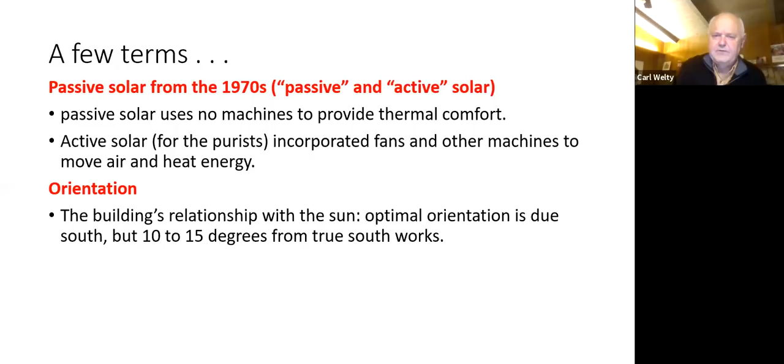Orientation. Orientation is the building's relationship with the sun. The optimal orientation is due south, but 10 to 15 degrees from true south also works.

Thermal mass is the material, usually a concrete slab, that absorbs and stores heat energy. A building is heated when heat energy accumulated during the day radiates into the building space during the night. And a building is cooled when the heat energy accumulated during the day is absorbed in thermal mass, and later transferred into the cool night air.

I'll talk about this more later, but the cooling aspect is why we think it's not just about solar orientation, but the advantages of cooling with natural systems. And I think that's going to be more critical as we move into a warmer climate.

A couple of big ideas that I want to put out there for conversation: think of the building shell as an energy system, not just an envelope or a box that we put equipment on top of or inside of. This is, I think, a real critical shift that I find really interesting.

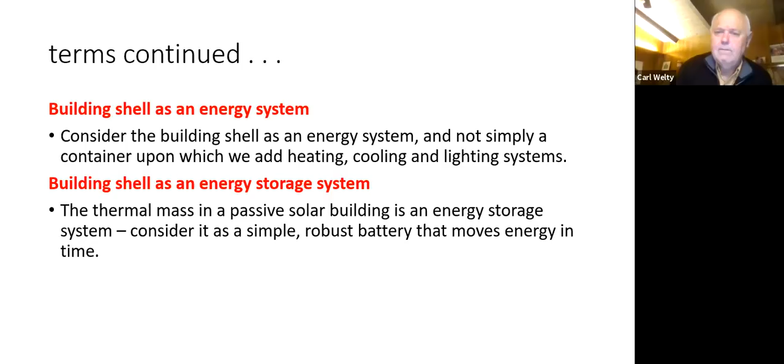And then also the building shell as an energy storage system, like the building shell as a battery. More on that later. So advantages: cost-effective. Passive solar buildings are typically 50% or more efficient than normal buildings, with little or no increase in construction cost. Passive design strategies reduce cost of energy and maintenance over the life of the building.

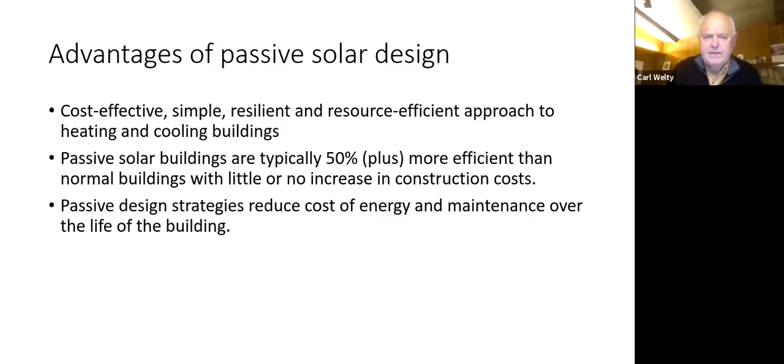This is really critical. Passive solar buildings continue to provide thermal comfort even when the energy is interrupted. With power shortages and power shutoffs for fire safety, this will become more important in our near future and our present.

We can build energy efficient buildings without the need of rare earth metals. And to me, this is an important part of the art. Passive solar buildings connect us to nature and increase our awareness of nature.

Consistently perform better. Typical green buildings are 35% better than normal buildings, whereas passive solar buildings are typically 50% better than normal, and many are 70 and 80% better than normal buildings. So a well-designed passive solar building is really 2 or 3 times better than typical LEED buildings.

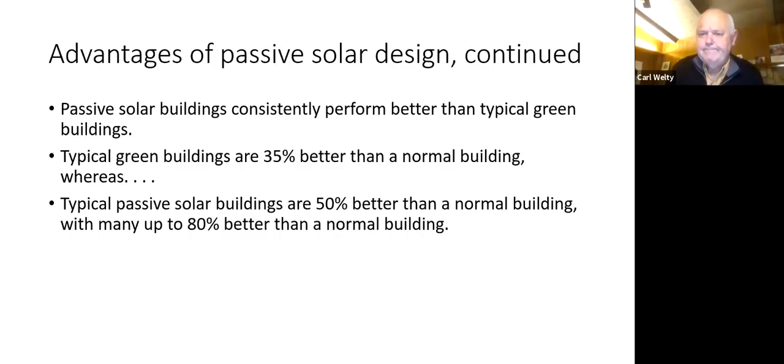Some questions that people ask: what about existing buildings? There's lots that can be done. What if the site does not have proper orientation? I'm going to show you 2 projects that show what you can do with a little bit of creativity when the site is not ideal.

And passive solar buildings look like they were designed in the 1970s. I don't think that's true, but even if it was, climate change requires us to think about something other than fashion.

Questions I like to ask: why are we satisfied with 35% better solutions when solutions from the 1970s are two and three times more efficient without increasing construction costs? Why do we put so much confidence in machines and high technology when there are really beautiful examples in ancient history, in the 70s?

And why do we ignore the beauty and simplicity of nature and the benefits of working in partnership with nature? Principles of passive solar. I apologize, I'm going to probably race through a lot of things so we can get to questions, but I'm willing to share this so people can spend more time in the privacy of their own homes. How it works.

If only there was some kind of infinite power source that was free to use all day, every day. That's the obvious point.

Passive solar works from really simple facts of nature. The sun is lower in the winter and higher in the summer. Nighttime temperature in California is cooler, 25 to 30 degrees cooler than the daytime. And there's always a reliable prevailing breeze for natural ventilation and summer cooling. It's really very simple, and if one pauses and thinks about it as part of nature, these simple things can be leveraged into making very efficient buildings.

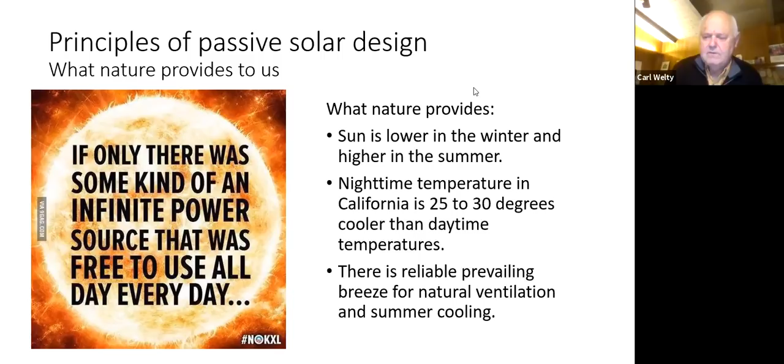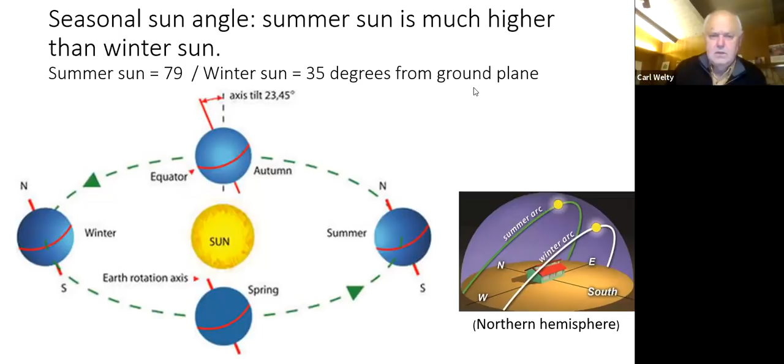I think we probably all understand this a bit, but the reason why the sun is lower in the winter is because of the tilt of the earth.

Starting off, the first rule is orienting buildings with the long direction east-west. This is a plan for a visitor and cultural center for a project that we've been working on.

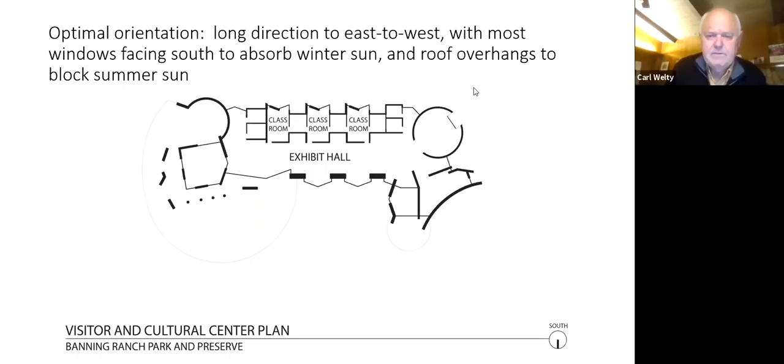And beyond the building, we can think about using landscape to shade buildings or manage the microclimate outside of a building.

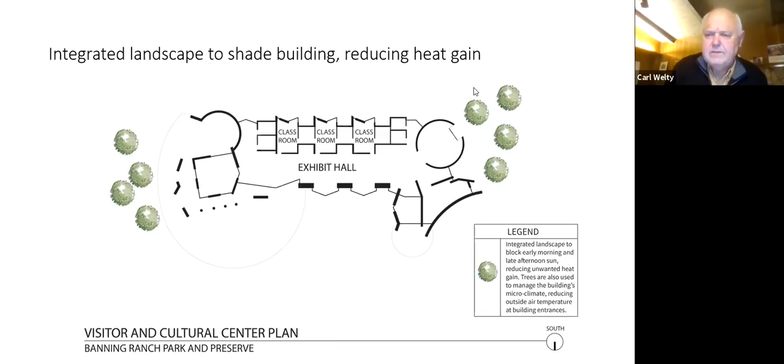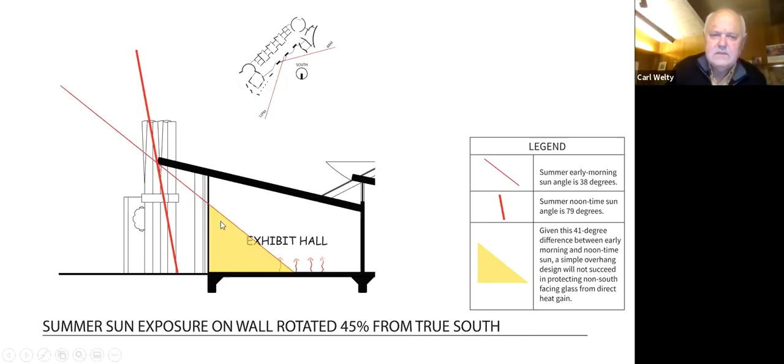So the same building, if it was oriented 45 degrees to the east, the early morning sun would come into the building at 8 o'clock, and because that sun angle is so low, there would be a lot more direct solar gain, heat gain, than for a building oriented to true south.

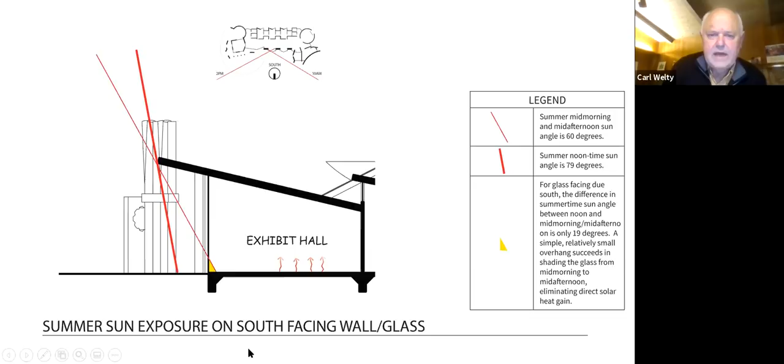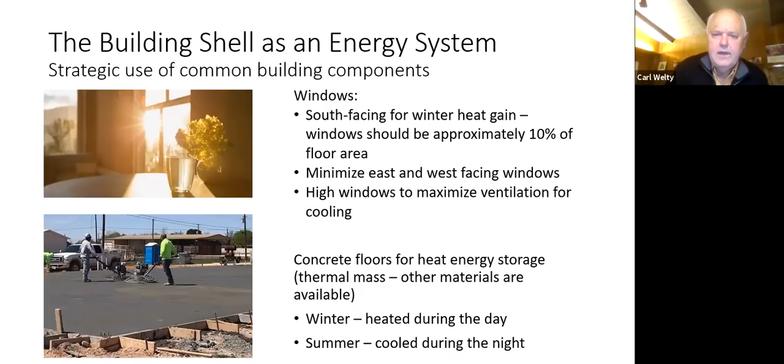So the building shell is an energy system. The idea is we start with the stuff that's already in the building: windows, concrete slabs, roof overhangs, walls and roofs, and just think of those not just as the thing that makes the shell or the design, but think of them in an integrated way to make a building more energy efficient.

And you're going to pay for those anyway. So the idea is you use those in the right way to leverage the most energy efficient design using these materials that are often not considered as part of an energy system.

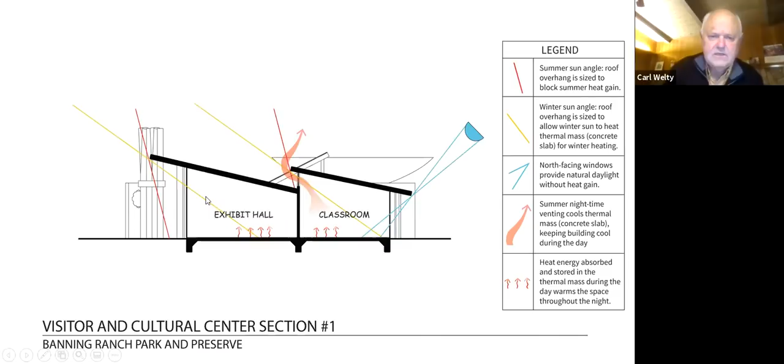In the building - and I'll show this in more detail - the building is designed so there's a few places where there's an eyebrow or clerestory facing north to bring natural light into the exhibit hall. This combination of south-facing glass and north-facing glass means the exhibit hall would require very little artificial lighting.

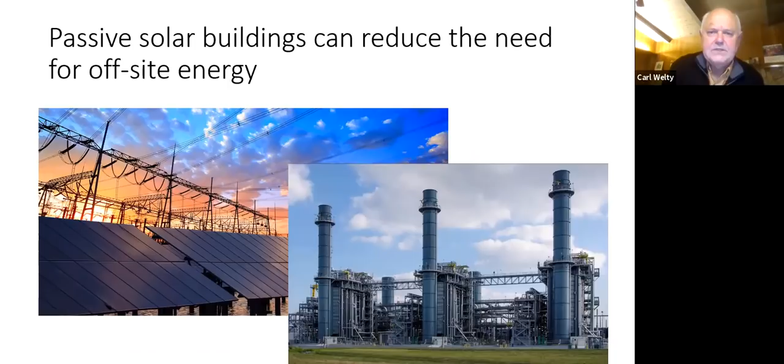Passive solar buildings can reduce the need for off-site energy.

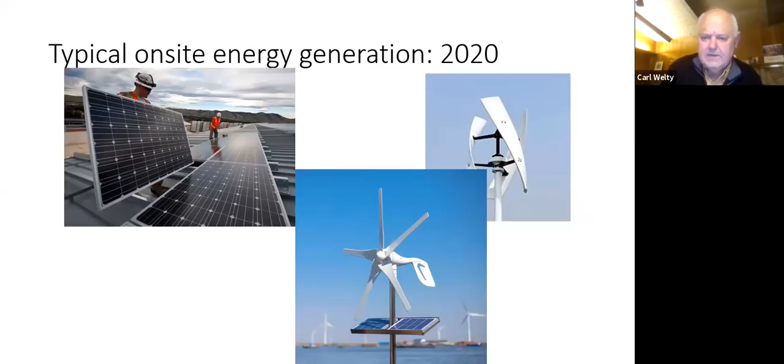Now I'm going to start talking about today versus the 70s. Today, typical on-site energy generation, 2020: solar panels, windmills, even kind of silly machines that try to combine windmills and solar panels. On-site energy generation, 1973.

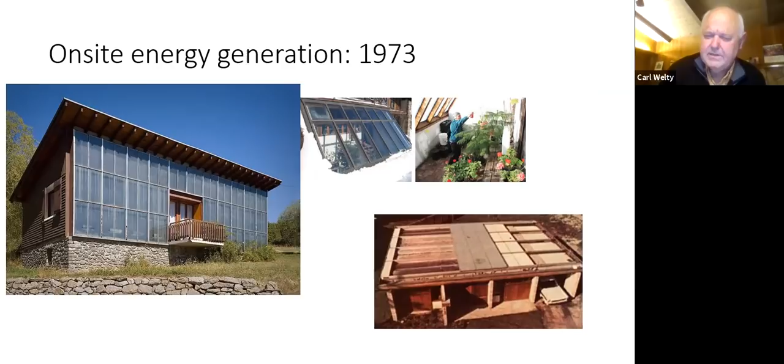In the 70s, because we didn't have such high technology, we designed buildings using water and glass and other materials to make the building efficient. So I think of that building as an energy system. Typical heating and cooling machines and equipment.

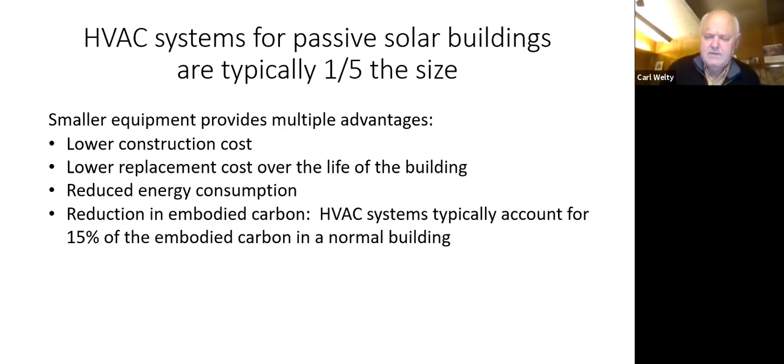HVAC systems for passive solar buildings are typically 1/5 the size. The smaller equipment has multiple advantages: lower costs, lower replacement cost over the life of the building, reduced energy consumption. HVAC systems typically account for 15% of the embodied carbon in a normal building. So if the mechanical system is smaller, or even not required, you not only save the carbon and cost of that system, but you save that 4 or 5 times over the life of a building.

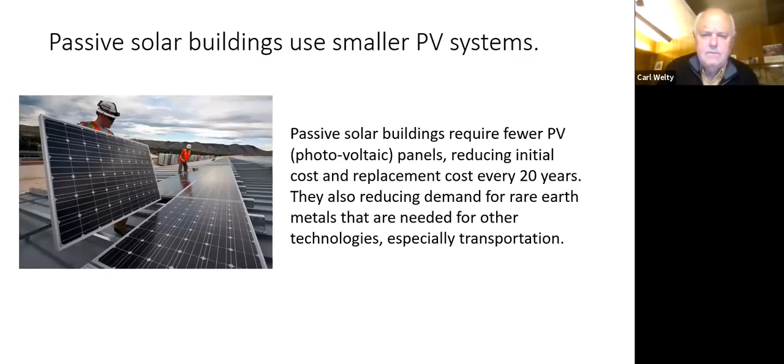Passive solar buildings require less photovoltaic panels. Fewer solar panels, less high technology, will allow us to reduce our need for rare metals and other toxic issues with batteries.

Solar-oriented and climate-appropriate design in ancient history. Ancient history is filled with lessons about how to build great cities without our modern energy grid.

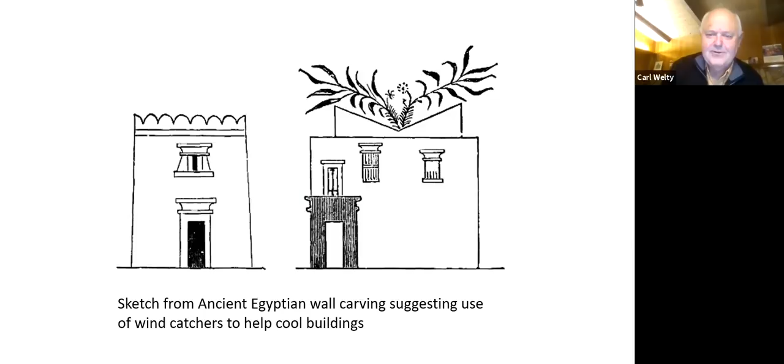Wind catchers are wind cooling devices. There's some evidence that these might have been used in ancient Egypt 3,000 or 4,000 years ago. This is just a drawing from an Egyptian wall carving.

Always nice to quote Socrates, or maybe even learn that Socrates was maybe an early passive solar architect. Socrates thought that houses with proper solar orientation and porticos made a better house. The plan on the left is the city of Priene, now in modern Turkey. It was the first Greek city built on a grid, and as you can see, the grid was oriented south.

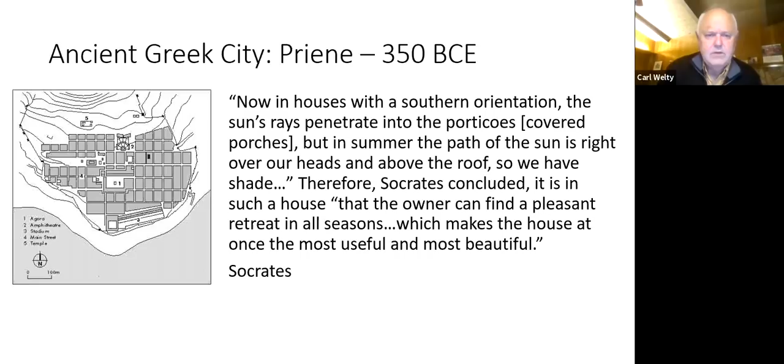Now I'm going to race through this. Courtyard housing is really common throughout the Mediterranean, and I think it's an important lesson for California because we have a very similar climate.

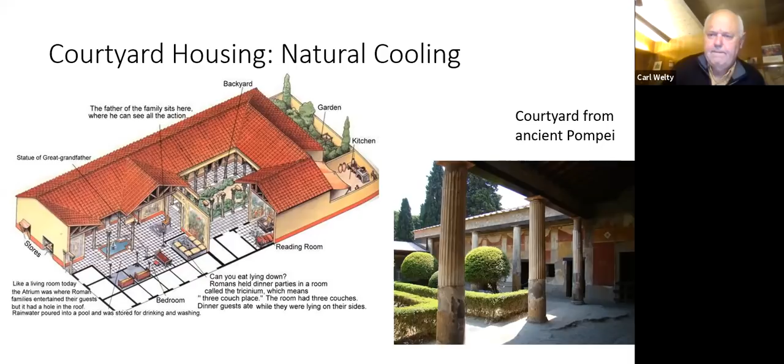The courtyard from Pompeii, Egypt, Spain - these are all more beautiful than that. Africa, India. The point is that there's plenty of evidence that these things work, and they worked when civilizations and cultures didn't have our modern energy grid. I think that's an important clue for us as we enter an uncertain future, when energy needs to be preserved and may not be so reliable.

Other examples: the Native American cliff dwellings. They use the cliffs, the face of the cliff above, for shading.

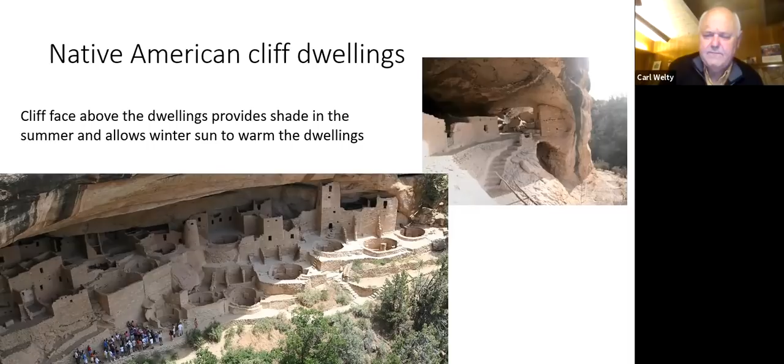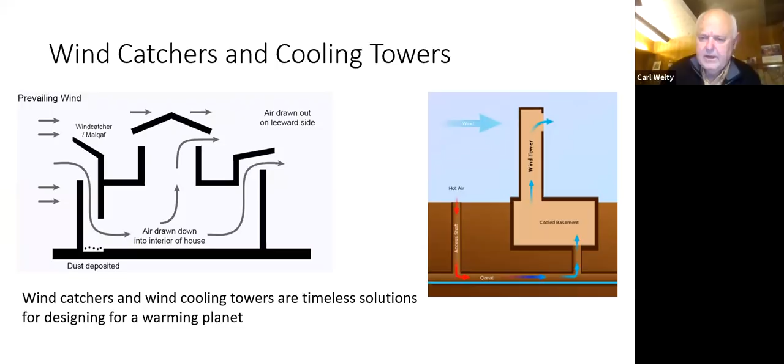Persian wind cooling towers, until my research for this document, were my favorite. Now I have a new favorite, but these Persian wind cooling towers sort of speak for themselves. They're extraordinarily beautiful, and the function is very clear. The way they work, they capture wind from the prevailing wind direction and channel it through the building. Oftentimes the air is routed through an underground tunnel and brought into the building.

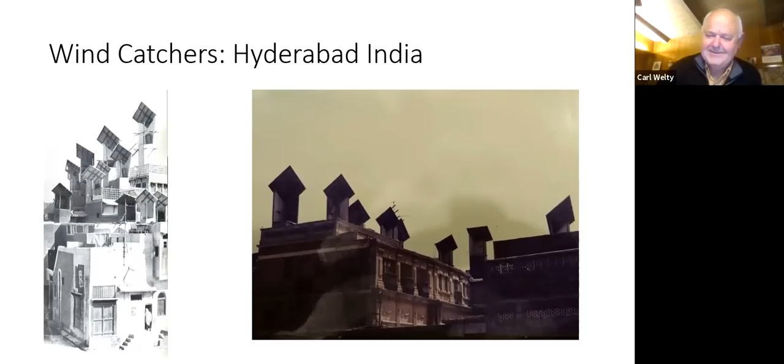My new favorite. Architects sometimes talk about solar orientation, and the buildings look like they're from the 70s - but there's something modern about it. I'm really excited about these things because they're just really, really cool, and there's such potential for great modern design creatively applied. Just great pictures of these cities that were covered with these wind catchers. I want to learn more about them, because it could be capturing the wind, but it also might be working as a wind foil that helps draw the air out. But I think these are capturing wind.

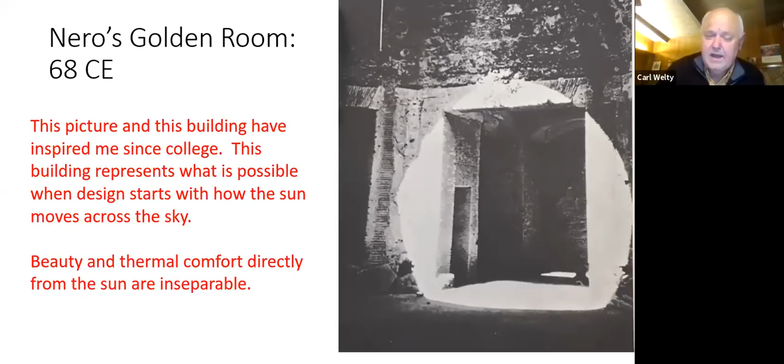One has to admit that that's a compelling picture. It's really beautifully simple - it's an octagon. There are 4 rooms, and each time of day that light effect would occur at different points - for example...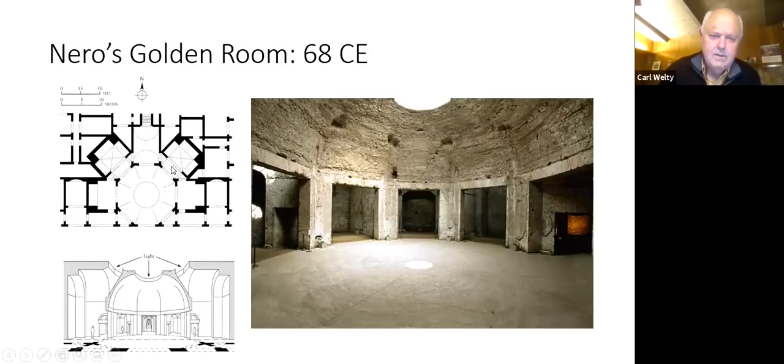When I saw that picture, I had already had my passive solar class, and I immediately went to the plan to see that it was designed correctly. So in the morning, light would come here; mid-morning, mid-afternoon, late afternoon.

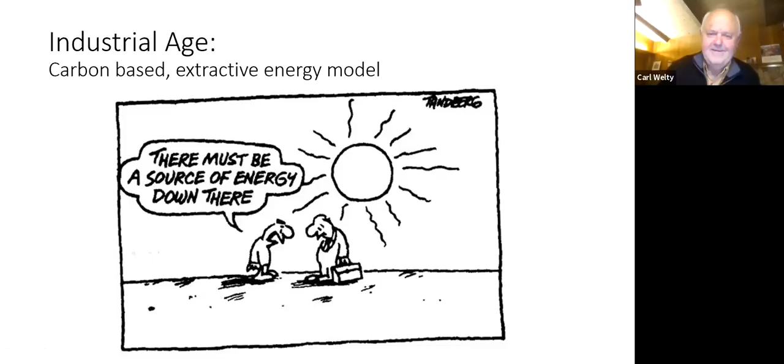So it's the industrial age, or maybe the 1990s also - we sometimes miss the forest.

Recent history of passive solar: a professor I had in college, who I'm now starting to work with, Ken Haggard, received money from the state and federal government for research on how to build energy efficient buildings, he and others. There was great work - great solutions discovered and demonstrated.

But in the 90s, we lost that. So I'm a real advocate for trying to recapture that knowledge, because we can provide more efficient buildings, more cost-effective, and more resilient buildings.

The context: passive solar research was motivated by the oil embargoes and the oil crisis. But some smart architects were even thinking about solar orientation before the 70s.

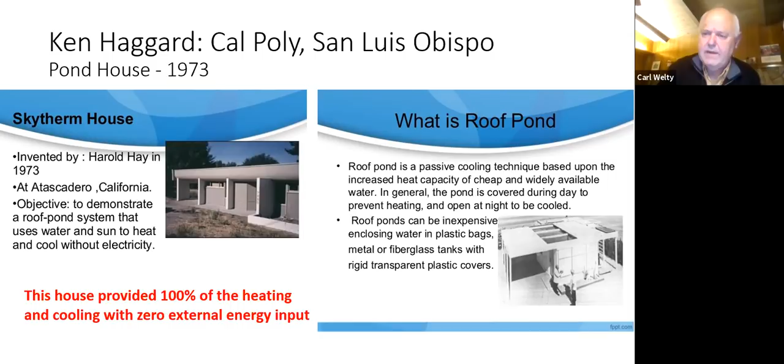This is a roof pond house designed by Ken Haggard in 1973. This house provided all the thermal comfort, all the heating and cooling, without any energy input from the grid. It's completely possible. Ken Haggard continues to do extraordinary buildings, which we'll talk more about.

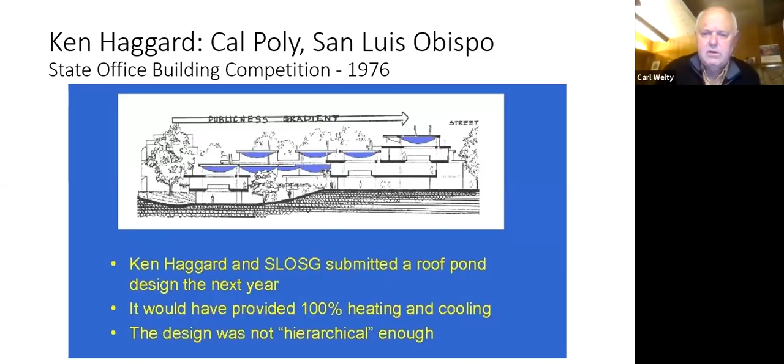This is a design he created for a state office building that would have provided 100% of the heating and cooling in 1976, but the state thought it wasn't noble or hierarchical enough, so it wasn't built.

Another important person who did work in the 70s and 80s was Ralph Knowles from USC. There's a great body of knowledge and research, but he really looked at urban forms and building cities in a way that provided direct sunlight.

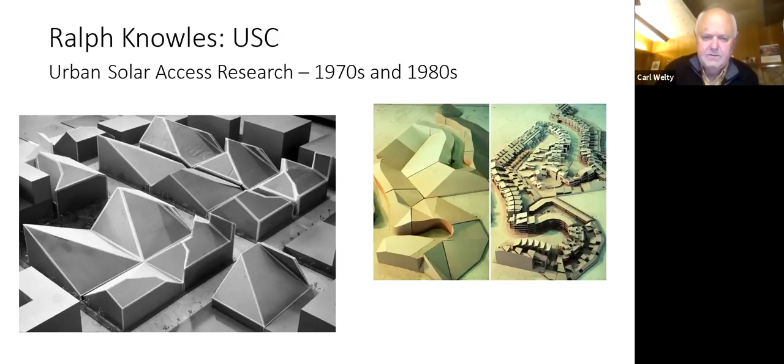In the 70s, two home developments in California incorporated these ideas, the Village Homes in Davis and Meadowood in Claremont. I just think of all the millions of homes that have been built that turned their back on these ideas.

So what happened to the research from the 70s and 80s? Political stability in the Middle East created cheap oil, increasing interest in PV energy systems and other complex technologies. The simplicity of passive solar design creates fewer marketable products and specialized services.

I love this cartoon with a solar powered tanning salon. I think it represents our interest in high technology.

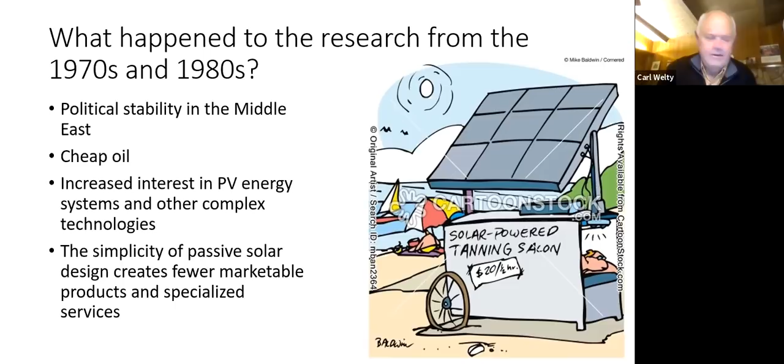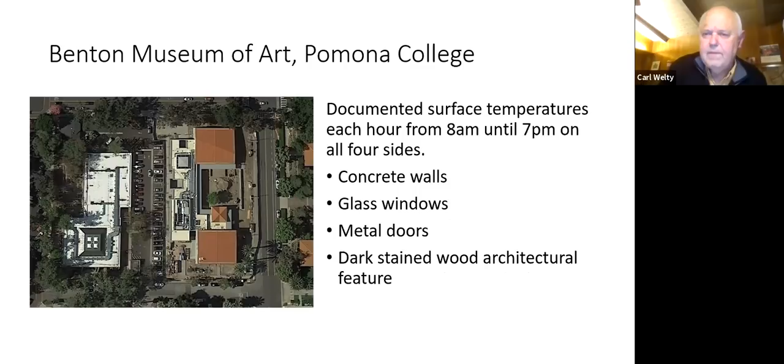I'm going to start racing through this. We did some research measuring the temperature of the Benton Museum. We measured the surface temperature on concrete walls, glass, metal doors, and wood every hour from 8 a.m. to 7 p.m.

The hourly average temperature on the south side is typically 10 degrees less on each material than on the east and west sides. This is because during noontime and afternoon, the sun angle is so high that a lot of heat energy is reflected off the surfaces, whereas in late afternoon and early morning, the sun is lower and more energy is absorbed into the walls. The daily high surfaces are quite extraordinary.

The east elevation glass reached 145 degrees. The south elevation glass never went above 110 degrees. This is a surprise, and I'll talk more about it: the dark wood stain on the east side reached 155 degrees.

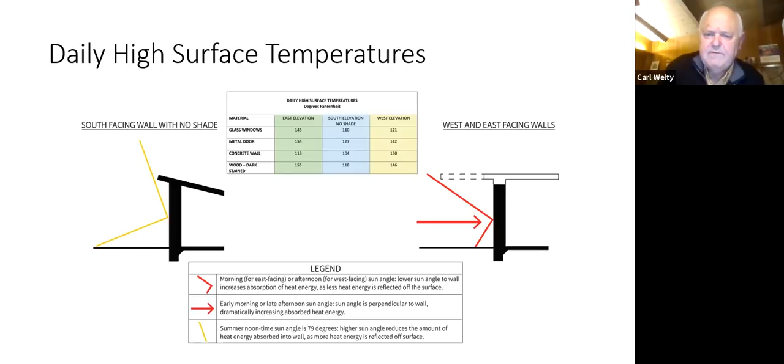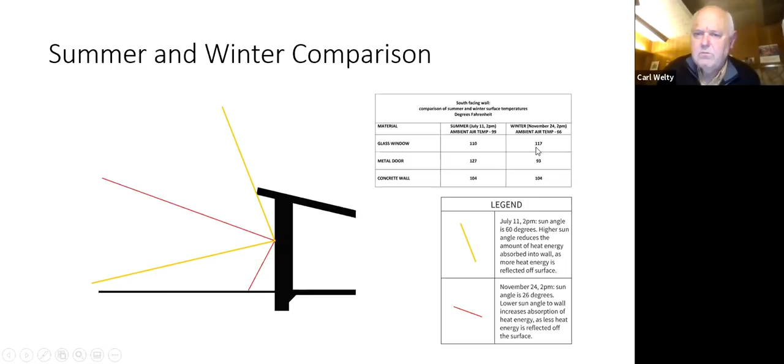Comparing summer and winter at 2 o'clock, even though it's 30 degrees cooler in the winter, the building temperature still warms up. This is because in winter the sun is so much lower that more energy is absorbed into the wall, which explains why temperatures are greater or higher even though it's 30 degrees cooler outside.

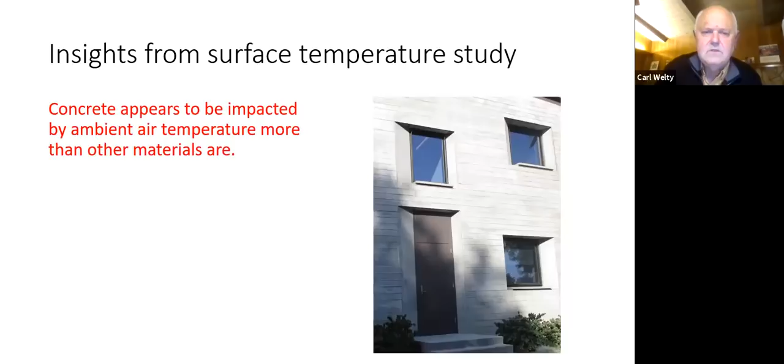A couple of surprising observations: even the light shade from a small tree cooled the temperature on the concrete. The temperature there might be 6 degrees cooler than elsewhere—it was really quite a dramatic difference. The possible lesson is how effective shading from trees could be on buildings.

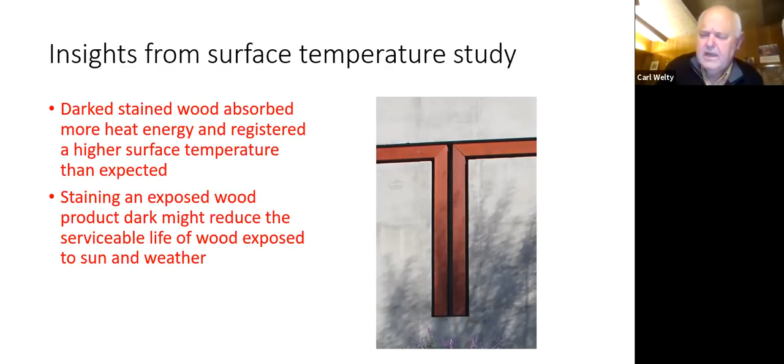Some other really interesting research from Ralph Knowles found that the thickness of some adobes was adjusted depending on which direction the walls were facing, which partly inspired why I did this research—why it's important for us to understand how materials are affected by which direction they're facing.

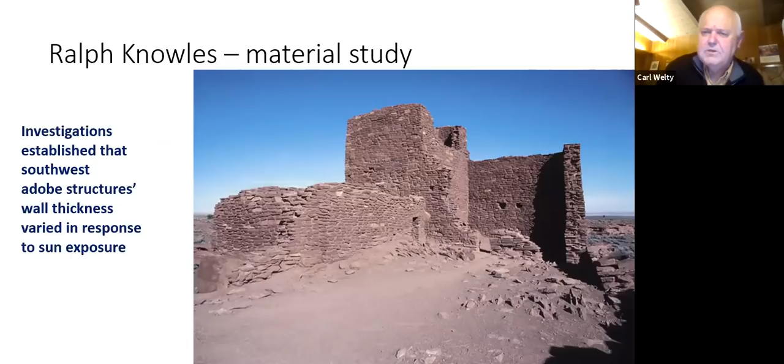So I'm just going to talk about what I've learned: the same decisions you make to make a building more energy efficient also make the building connect to nature. A simple passive solar house in Santa Monica—the street is at 45 degrees, so we had to do this odd design, but it necessarily gave us a garden outside the space.

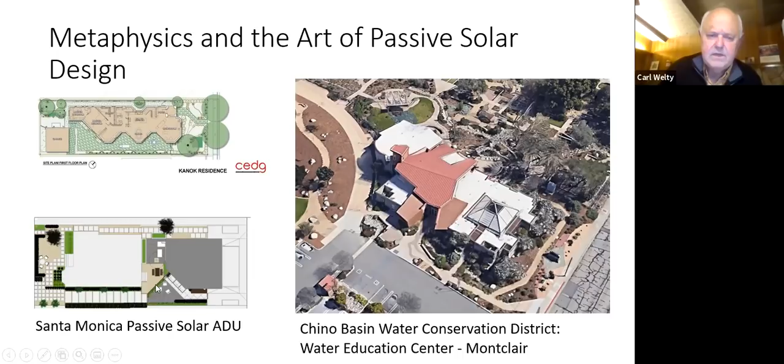This is a small project, an ADU I designed a couple of years ago. Again, creating a primary wall facing south, which is not parallel to the property line, created an opportunity for sun to come in and necessarily an outdoor garden space.

So you see the little three-dimensional drawing and the building built. That wall of glass enables light to come in. Because of the high glass, there's a double height space inside. The sun enters far into the north of the building in the winter, but can be shaded in the summer.

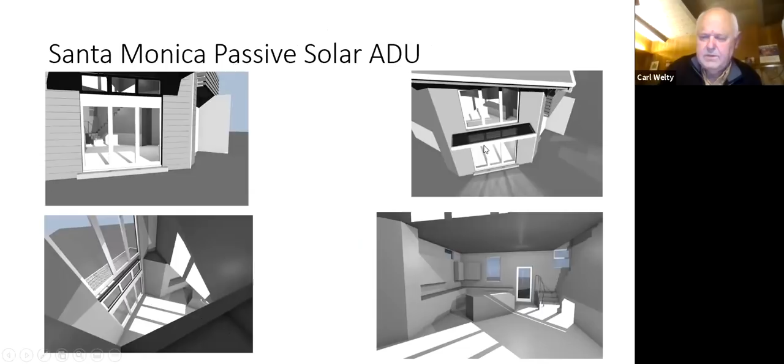The Chino Basin Water Conservation District—many lessons here. As we thought about how the sun moves, the wind cooling tower, with some windows on top and other windows, captures the last light of the day, really marking the change of time.

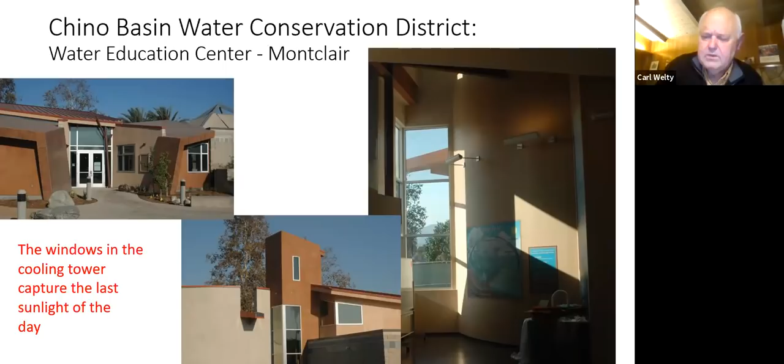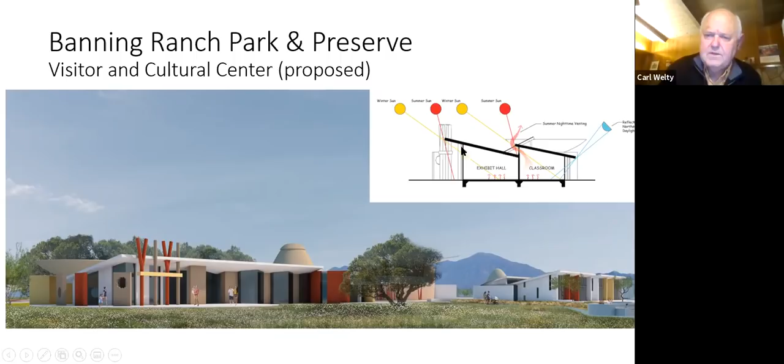The visitor center for Banning Ranch. This is the building, the visitor center facing south. So the design brings sunlight into the windows, and it also opens out to nature.

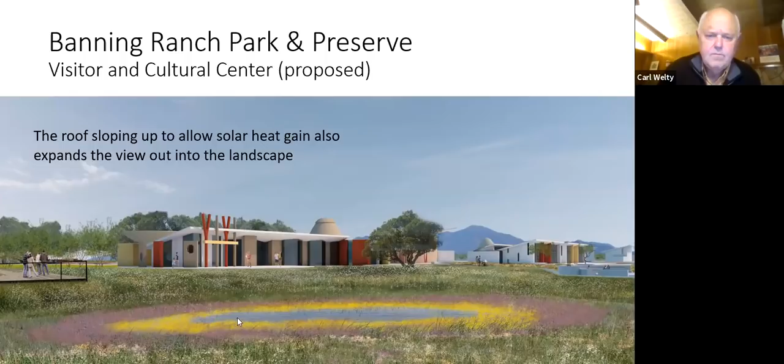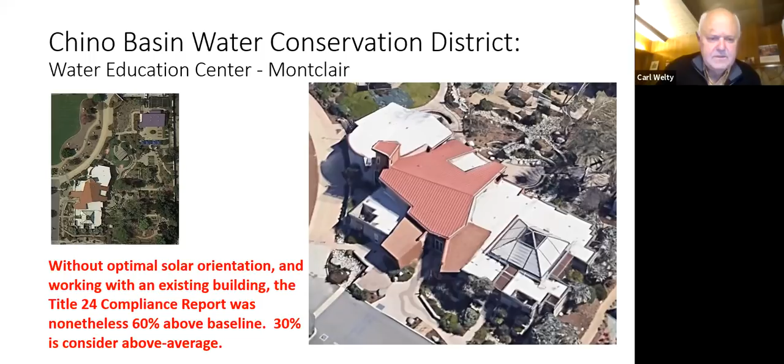I'm just going to race through some projects. This is the Chino Basin project, in Montclair—a really interesting project that, once COVID is over, will be open to the public. Without much effort, just thinking about the building envelope and natural light, we achieved our Title 24 compliance report at 60% over baseline. 30% and above is considered above average.

The passive solar home built in Santa Monica, as I explained earlier—it's a little different, but this building achieved LEED Platinum and was 75% over baseline for the Title 24 compliance report, 25 points higher than what our LEED rater had ever seen before.

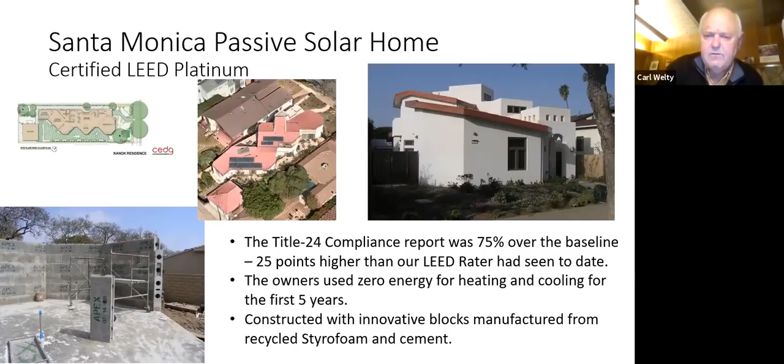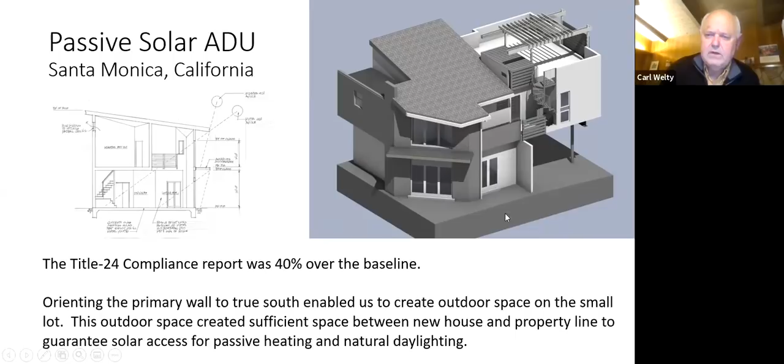Some images and drawings of the ADU I designed—you can see with the double height space, the light comes in. This project was 40% over baseline. So the lesson here is: building that wall oriented to the south created a space outside, and regardless of what is built on the next property, the light will always be available.

This is the Congregation Beth David in San Luis Obispo, designed by Ken Haggard, who has built 200 to 300 buildings. He really has much to teach us. This building is 80% more efficient than a normal building.

Actually, maybe I misspoke—its carbon footprint of greenhouse gas emissions is 30% lower than a normal building, and it actually costs less than a normal building. This is really extraordinary.

I want to say this very slowly: he's so knowledgeable that he was able to build this without an air conditioning system. There's no mechanical cooling system, which many people assume means if you don't have air conditioning, you're going to suffer and it'll be a little warmer than normal. But he's documented that it actually stays cooler than a normal building with a conventional mechanical system. This is really, really extraordinary.

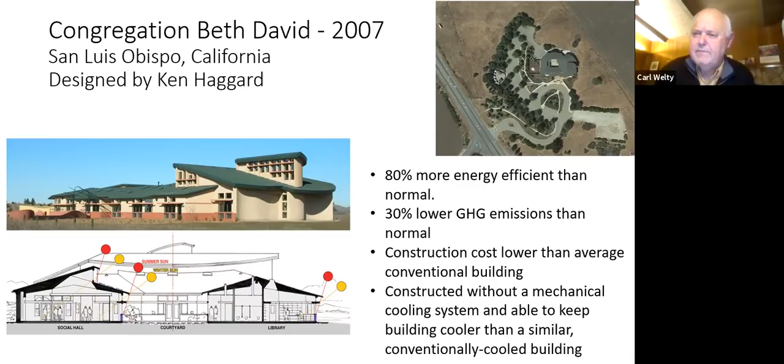And this building—San Luis Obispo has a similar climate to, say, downtown Los Angeles. Not as hot as San Bernardino, but it's not on the beach either. This is truly, truly amazing.

Before COVID, we started a conversation with some people at TBI about remodeling the building, and we all agreed it would be great to bring natural light in. Thinking about wind catchers and Ken Haggard's work with his synagogue, I thought we could design light scoops to bring in natural light, but also do double duty helping bring in cool air at night to help cool the building.

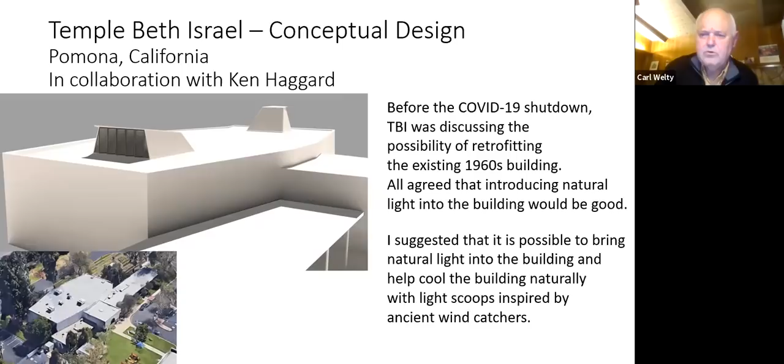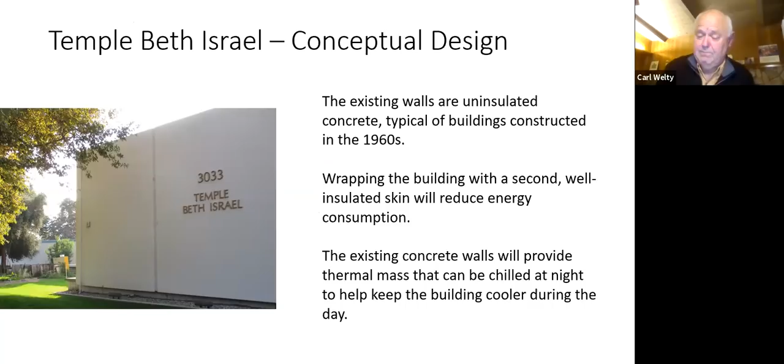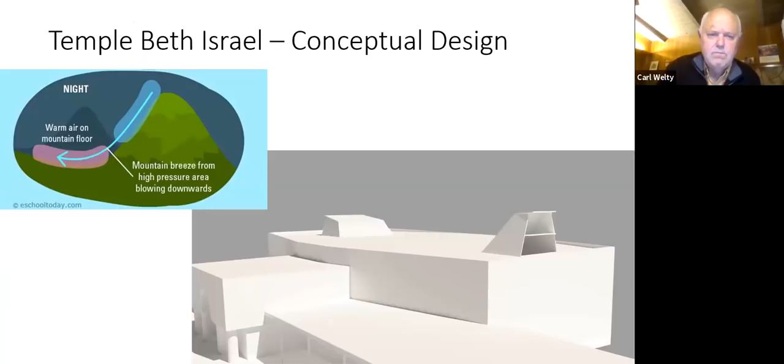The existing buildings have walls of uninsulated concrete, but by wrapping the building with a second insulated skin, that would make a lot of sense for energy efficiency. If we do that, the concrete wall becomes an extraordinarily sufficient thermal mass for cooling. We can also rely on prevailing wind, cooler night temperatures, and a naturally occurring mountain breeze that comes down from the mountains.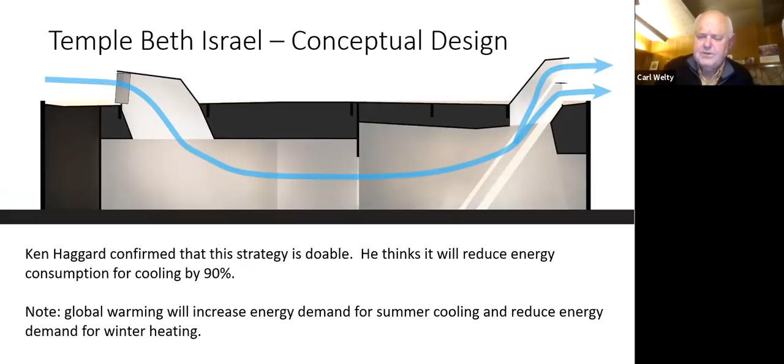Also, with global warming, our need for energy for summer cooling is much more critical than winter heating. Quick examples: I think atriums and courtyards have a lot of potential for being part of a new building's heating and cooling strategy.

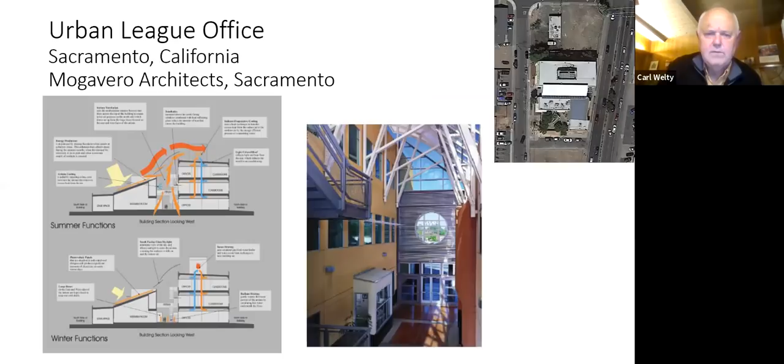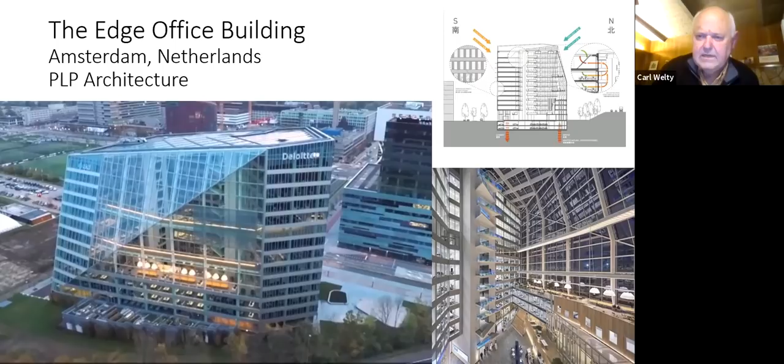This is described as the smartest office building in the world, in Amsterdam. Same principles: there's a large atrium, a beautiful space, oriented north, and the skin is designed to reflect heat and vent the building.

Quickly running through our Banning Ranch project: it's 380 acres of native habitat to be restored with a 10-acre park, including research and education facilities consisting of 4 buildings. Most of the buildings face south and open up to the landscape.

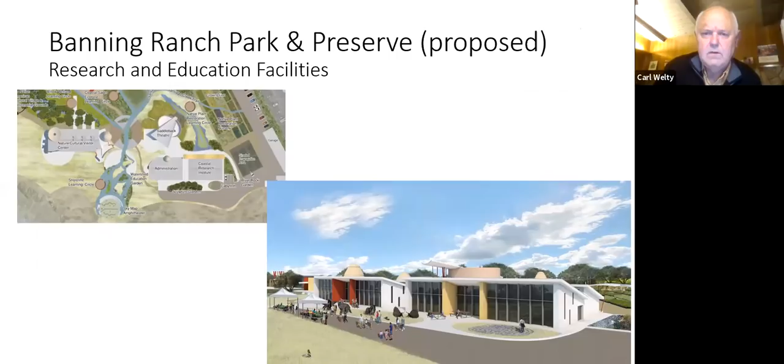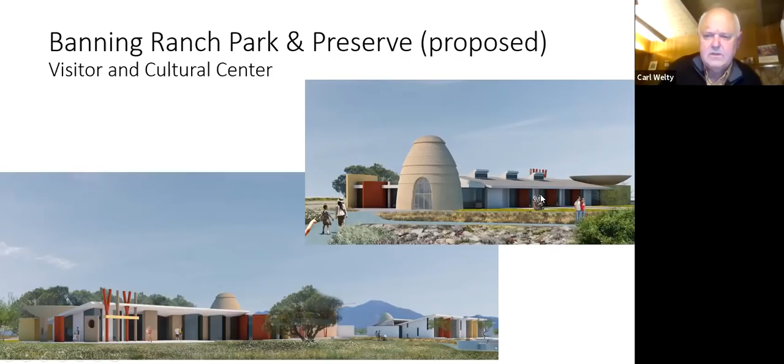Revisiting this building: the south facing side and the north facing side. So this is the example - the south facing glass is here, but the roof is designed so the winter sun comes into the rooms on the north side. On the north side we have 3 small eyebrows that bring northern light into the main space.

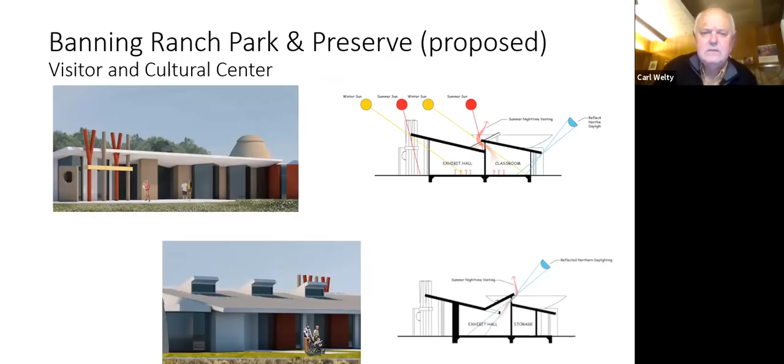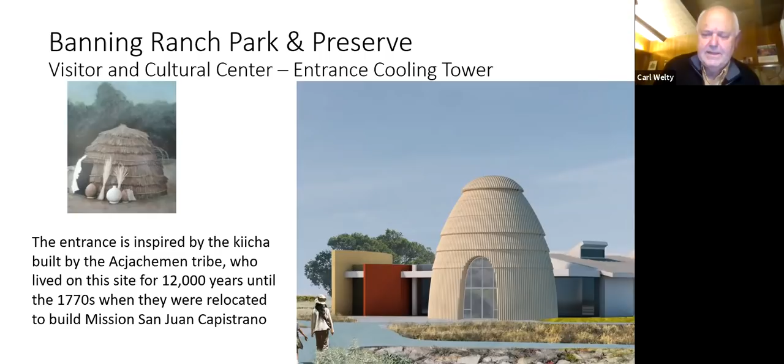The entrance tower is inspired by the kiicha built by the Native Americans who lived on the site for 12,000 years - that's a whole other story about environmental justice we'd love to discuss another time. It's reformed into a modern building entrance and wind cooling tower.

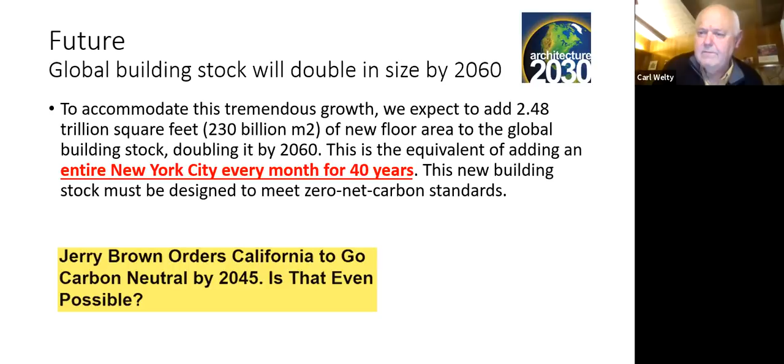So, how am I doing on time? The need for building better - to the question of what about new buildings, well, we need a lot of new buildings. We're projected to need a new New York City every month for the next 40 years. So there's plenty of opportunity to build new buildings that are more energy efficient with reduced carbon.

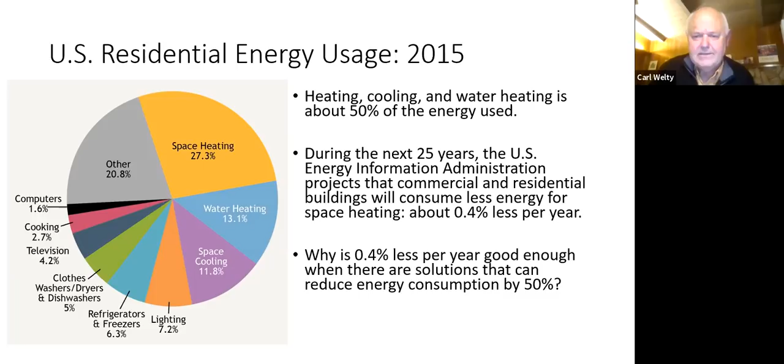From 2015, heating, cooling, and water heating loads are about 50% of building energy use. Over the next 25 years, the government agency projects we'll increase efficiency by 0.4% or less per year. I just ask, why is 0.4% less per year good enough when there are solutions that can reduce energy consumption by 50% now?

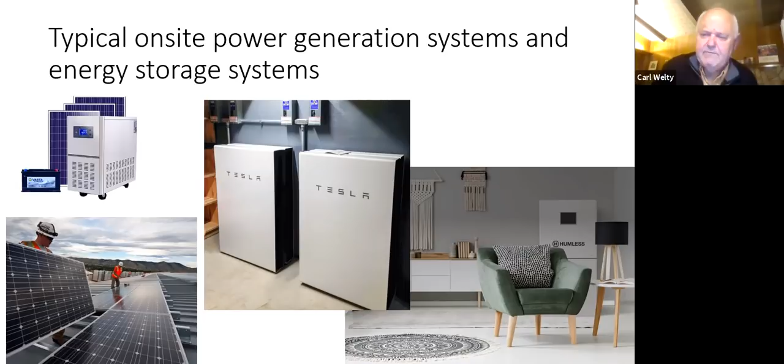I'm getting to the conclusion here: the building shell is an energy system. It's using the roofline, putting the glass in the right place, providing thermal mass - and there are alternatives to thermal mass other than concrete with a lower carbon footprint, but that's another story. It's just thinking about the parts of the building we're going to build anyway, and shaping them the right way to turn the building into an energy system.

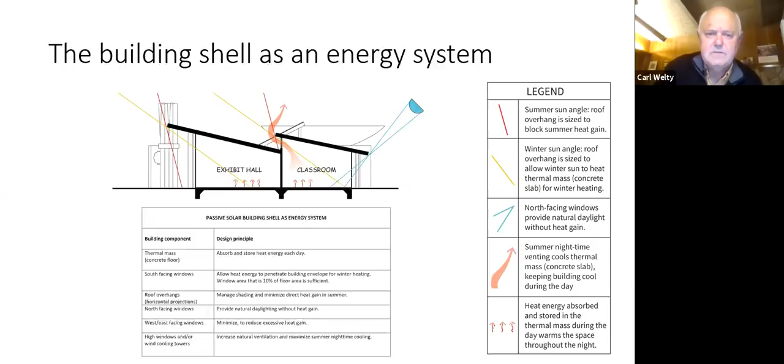The building as a battery, or an extension of the energy grid: I like to think about the potential for storing heat energy in the thermal mass like a battery. This is extraordinarily important, not so much in Claremont, but in a larger city. When we air condition our buildings, that heat energy doesn't just disappear - it gets projected out into the hot afternoon sun, which requires more energy to push it out of the building.

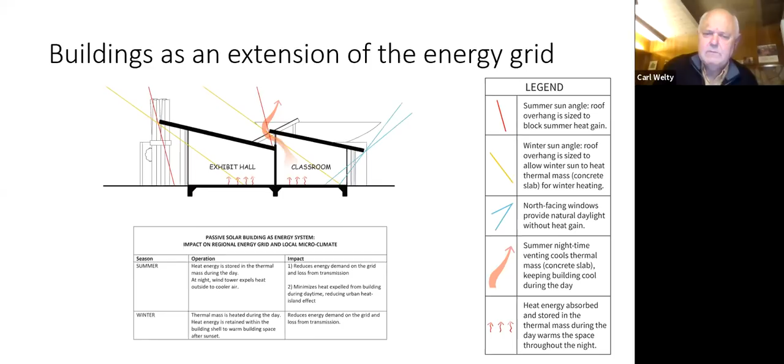But if we think of this building as a battery or energy storage, we can store the heat in the foundation, the concrete, the thermal mass through the day, and expel it into the night air when the air temperature is cooler. Just shifting that expelling of energy from daytime to nighttime becomes more efficient and reduces the heat island effect.

Climate change requires us to find new solutions to build more energy efficient and more resilient communities. Advanced technologies have their place, but ancient civilizations that built great cities without our modern energy grid, and creative engineering from the 70s that solved many of the problems that endure today, can provide solutions that are more efficient, more robust, and more cost effective than many of the cutting edge technologies marketed today.